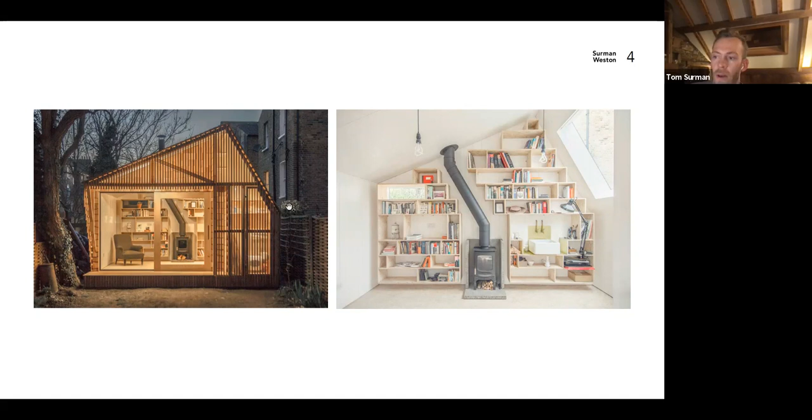And in working it and deploying it in so many ways, we learned about its scent, about its antifungal, antimicrobial properties, about its softness. Here you can see just how widely it was used, with the glowing screen here and behind, and here forming a log store with the door meeting it.

We still look back on this project with real fondness. The client was absolutely lovely, had a strong brief and was critically engaged. And a bit like the cafe, we were very fortunate that the project went on to win a few awards and was shortlisted for the AJ Small Projects Award.

The press and the attention that we received for this just gave us, it was really the launch pad of the studio, and we believe we could kind of go on and formally set up.

So the final project I'd like to just briefly talk about before we get onto the main body of the talk, the School of Food. This was a project we called the Cork Study.

Here, the broad concept for the project was that it was an extremely tiny garden, and we wanted something that would feel earthy and natural and sit quietly in its surroundings. So again, another garden room, and this time clad in expanded cork blocks.

At the time, this was really innovative. I think we were, I'm not totally sure, but I think we were the first to use this cladding on a new building in the UK, and it's subsequently been used by a number of other studios.

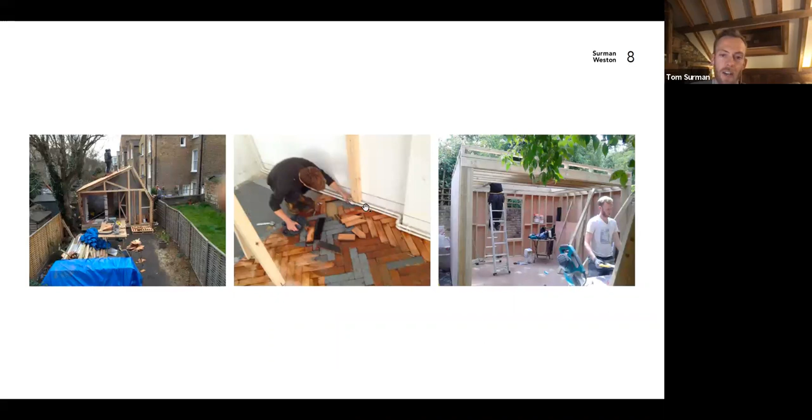We learned a lot about the cork working with the material. Just to prove to you that I'm not lying, that we actually were doing the work, here you can see us on various sites: the Cork Study here and the Writer's Shed, and painstakingly laying the reclaimed parquet flooring in the RCA cafe.

I've not really tried this approach before, but I'm going to play you a video that was made by the clients at the end of the Hackney School of Food project. Then I'm going to unpick the finished project and talk about how our approach and understanding of construction helped maximize the experience for the kids using the space.

So hopefully this works, and I think you should be able to hear as well as see.

Hi, I'm Ritka, head gardener, and this is Tom, a chef and food educator. We both work at the Hackney School of Food, which has some incredible gardens and some very special helpers. Our gardens are in the grounds of Mandeville Primary School, a state school in Hackney, part of the LEAP Federation, so children from 3 schools can come and help us tend the produce. Inside, the architects transformed this old caretaker's cottage into a wonderful teaching kitchen, where we bring the produce harvested from the gardens outside and transform it into really tasty meals using lots of different cooking techniques. We offer classes to schools across Hackney and London, and we also work with the charity Chefs in Schools to bring local communities into this wonderful food education hub.

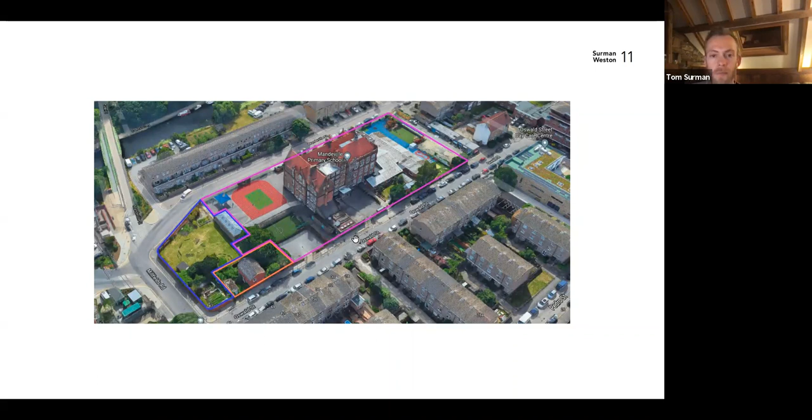And so here you can see the site of our Hackney School of Food. So where I'm dragging my cursor around, this is Mandeville Primary School in Hackney, one of the 3 LEAP Federation schools, and the area outlined in orange is our site. This was a former caretaker's house, which had been redundant for 5 or 6 years. This is quite common now, as when caretakers retire, it's governmental policy in the UK that their incoming caretaker doesn't live on site, so there's lots of these buildings becoming redundant. This is a look at the building from the street on the left here. It's a pretty unloved building that the kids were a little bit scared of. We've heard kids calling it the scary house or the ghost house.

Our design approach was informed by some of our previous work. Fundamental to the client's brief was the idea that children learn by doing in a hands-on way, so they're not just watching other people, everything they're being taught, they're physically doing themselves. We took this idea and tried to apply it to the building, so we settled on the approach that we would expose the construction ingredients of the building and the garden, so that the kids and adults who engaged with it could better understand how their space was put together. Or even if they didn't understand it, they could ask questions like, what's that weird stuff on the roof? Or why is there that bit of metal there?

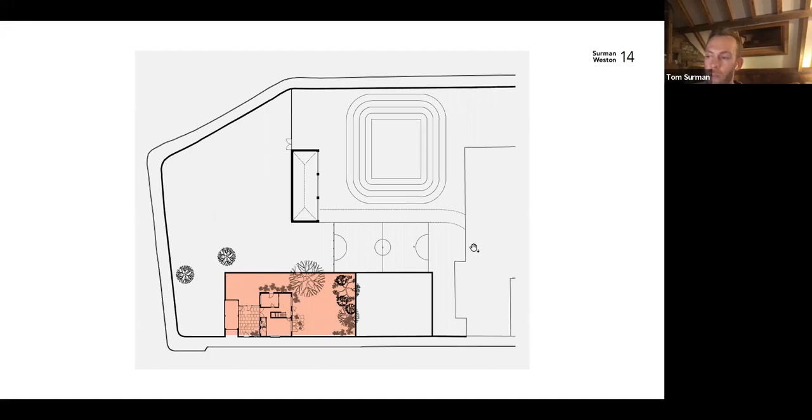So this slide is the eventual site plan. In the middle here, you have the heart of the project, which is the educational kitchen. On the south side here, this is the new kitchen garden that you saw in the video with the step terracing, with a new public entrance. And on the north side, a courtyard access for students and visiting teachers, with food store and a couple of WCs in the former garage block.

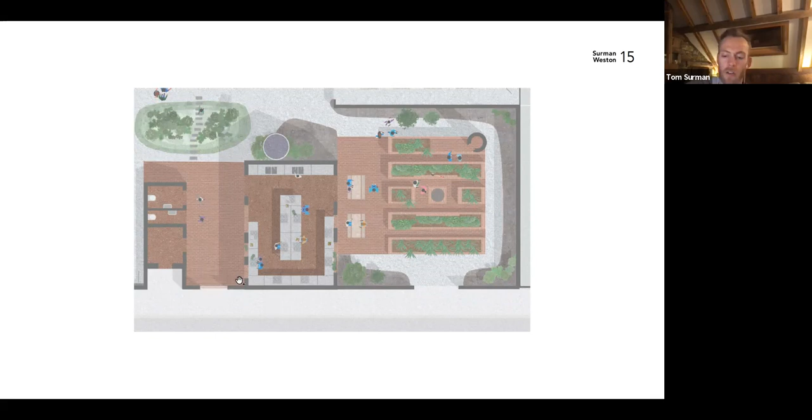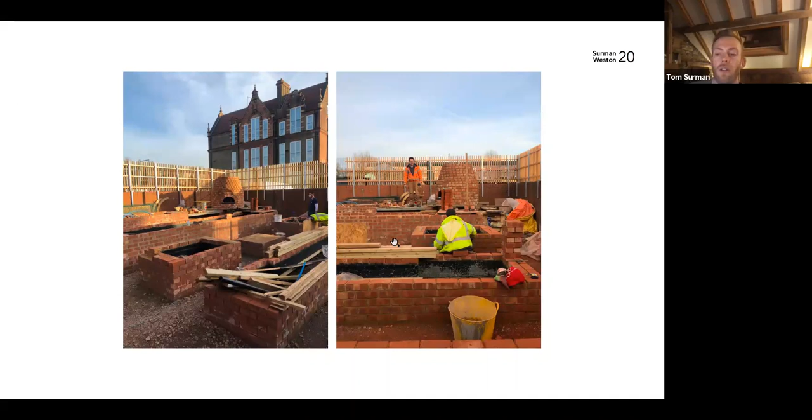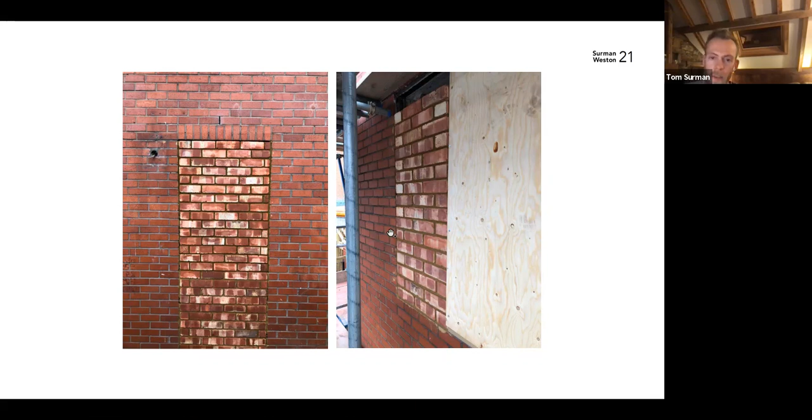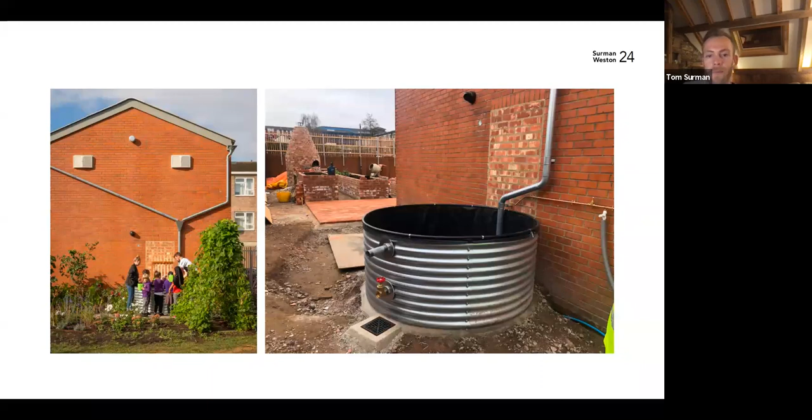Here, just a few images taken from a lesson with the kids up close and personal, seeing how their produce is coming on, and Tom trying to get them to eat various herbs and spices that they're unfamiliar with. Now I'm going to take you inside, and hopefully here our approach of the exposed ingredients and the loose fit combined with the more targeted spending becomes clearer.

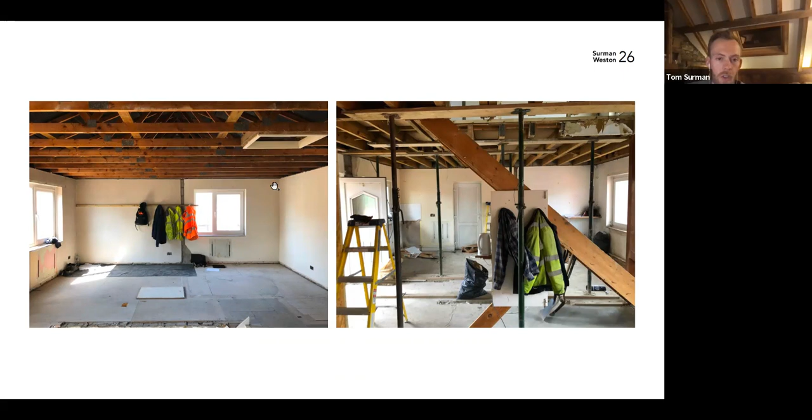And then coming up to the roof, as you can see from the previous slide, when we stripped out the ceiling because we had to get rid of some existing asbestos, it revealed these rather nice roof trusses. And rather than trying to put a false ceiling back in, which would be unnecessary expenditure, we just thought, let's expose the joists. They had a really nice texture.

And then the next challenge was, okay, if we're going to do that, we do need to re-insulate the roof to bring it up to building regs. So how do we go about that in the most efficient and loose fit fashion, if you like?

It's a simple, cost-effective way to do that, and it's on the show. And actually, we quite like the fact that when it's on, it glows red and almost looks like the grill element of an oven.

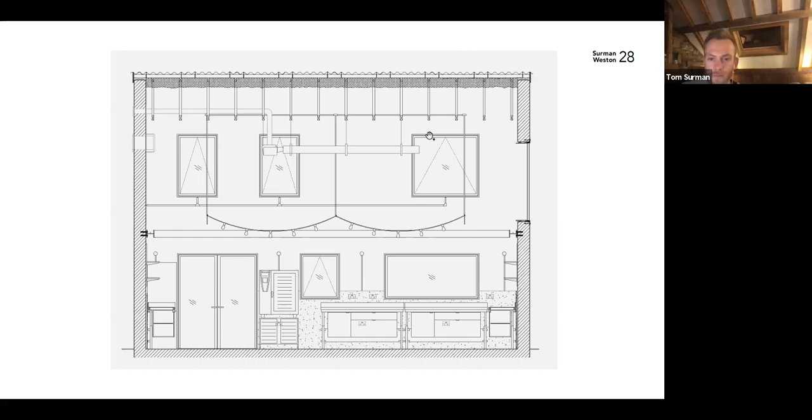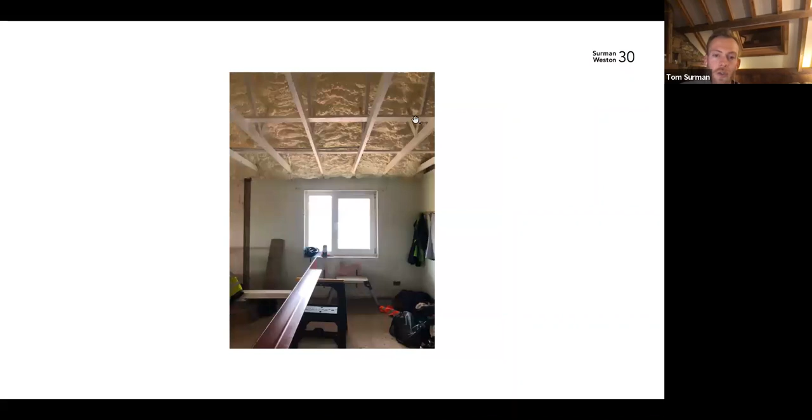In this photo, you can see all of that from the section brought to life, if you like, and you can see how we have the exposed heating element above, and then the solution to the insulation was to use this spray foam insulation, because it would fully fill around the quite fiddly roof trusses, and it was a very efficient way to get us up to the required U value.

And then we were faced with the decision of, well, what do we do with that? And we just exposed it, because we liked the slightly surreal texture of it. It would have cost a lot more to try and disguise it. It also worked quite well because of its extremely textured surface and its relative softness. It works very well as an acoustic baffle.

And here you see it on site, in its raw form, just after it was installed. And here you can see it. In the end, we spray painted everything in the same sort of off-white or light grey, just to tie it all together. I think it was a little bit too clashy before, but this picture captures that rather unusual texture of the spray foam insulation.

I have to say, not everyone loves it. We love it, but we've had a lot of people that really don't love it. And then the festoon lighting is simply hung from some galvanized conduit, which is fixed to the roof structure above.

And this photo, again, from during the construction process, captures this idea of the datum and the loose fit above and the more controlled below quite nicely, I think. You can see a trace of a former wall here that was ripped out. And then around the window reveals where we've made good, it's just done in the simplest fashion possible. But again, it adds to the highly textured palette above this datum line.

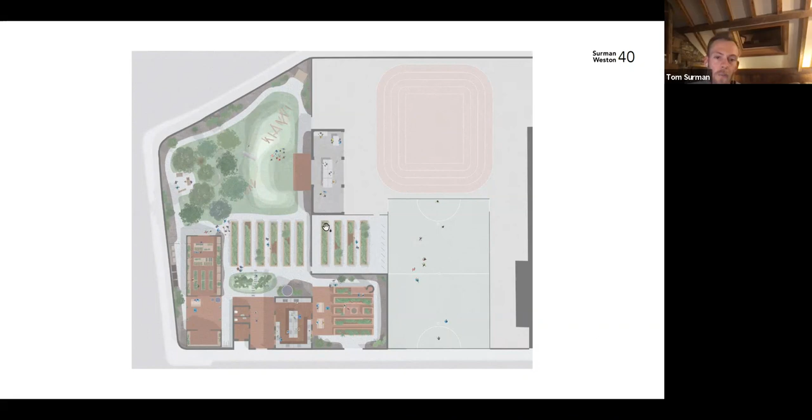This will become a multi-use teaching space, and here are a few visuals of the proposed propagation house and the re-landscaping of the playground, including much more natural and better play elements and interactive educational elements.

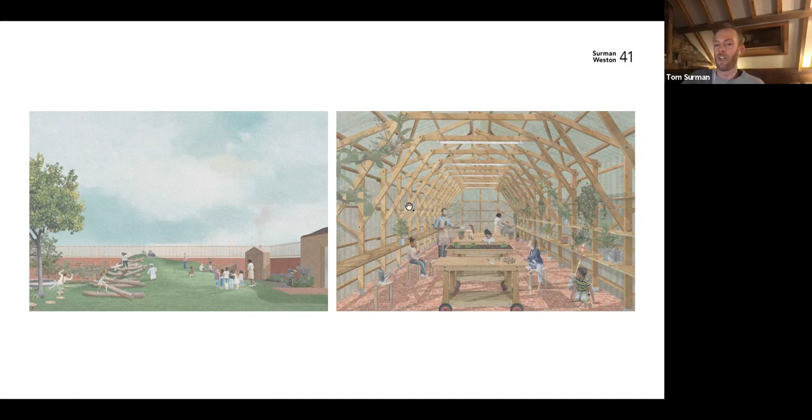I've tried to keep it relatively concise because I think it's always more interesting to respond to questions than just endlessly waffle on. So I hope that was okay, and I'll stop sharing and hopefully take some questions.